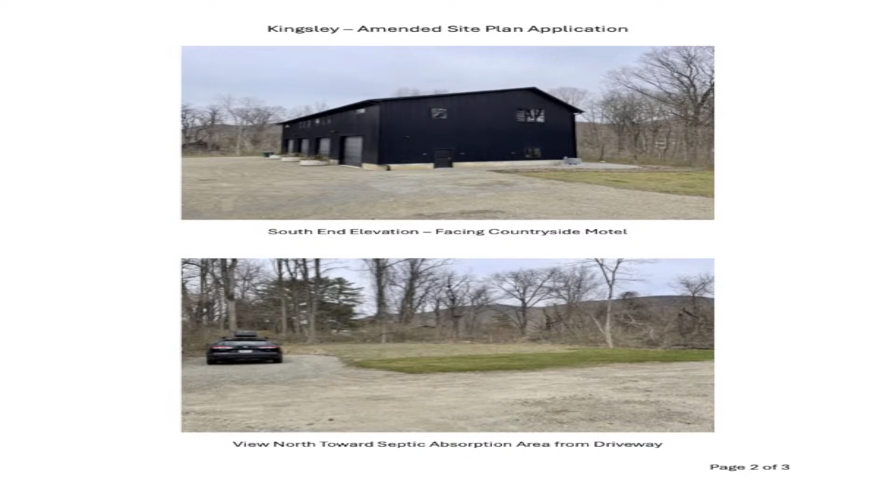I think it was just the truck traffic, I don't know exactly what, but I believe it was the truck traffic. There will be no commercial operations, whether Kingsley Tree Care or Forrest's business or any other commercial business, with this amended site plan. There will be no commercial truck traffic associated with this once the amended site plan is fully executed.

Okay, board members' questions, and then we can go to Ron's comments. On everything—parking, or just? Whatever you want to ask. We're getting down to the short straws on this one, so okay, just a couple questions.

So what was the original parking layout for when it was commercial, when it was a mix? There were four of the nine required parking spaces in the garage, and there were two on either side of the building, and then four off to the side. Is that where that car is, where the four were?

No, that actually wasn't one of them. Oh, I see. So the parking would have been one space on this side of the building, one on the other side, then four along the end, and four on the inside.

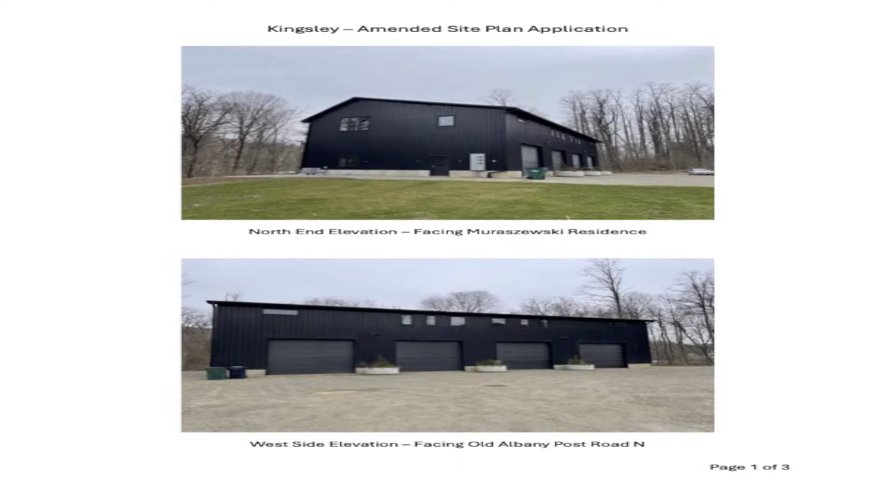So this is a question for, I guess, Steve or Ron. So this is a change to a multifamily use? Isn't there a parking requirement for multifamily? What is that?

He's got parking illustrated on his amended site plan. So is that like, what, one per unit? I think it's 1.5 per dwelling unit. Right. The bedroom doesn't factor in.

So what they're gonna do with... they are planning on some buffering along the front, some landscaping along the front of the building. Let's finish the question, let's just focus on the parking for now. The question was asked: how many spaces and where are they? Let's just do that question.

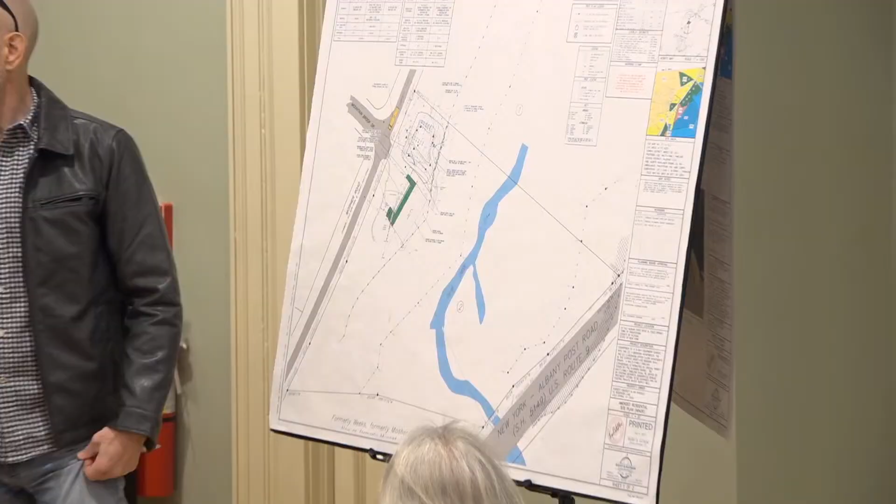Right now the cars park along here, and there was one space here, but they park right along the side here. I don't know if the idea is that they park along the front, but there is this parking area here as well. There is proposed landscaping and buffering along the front because this is where the windows are. So you have these 4 bays now, and you park inside the building.

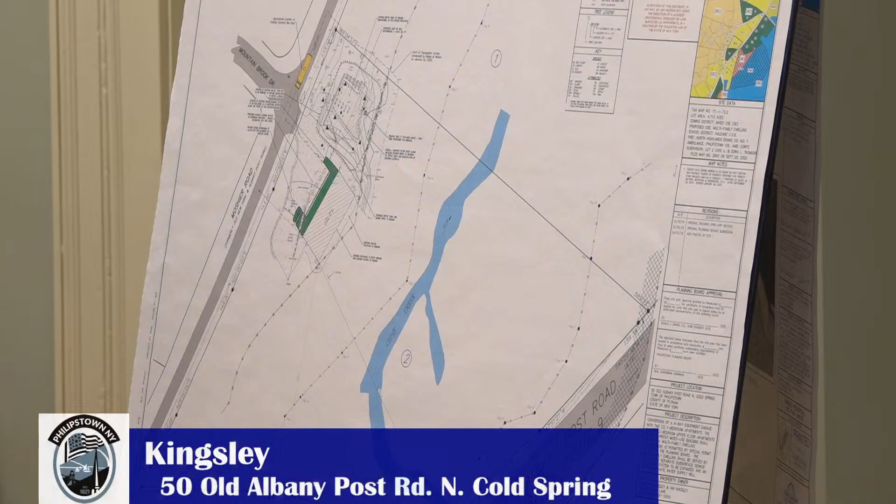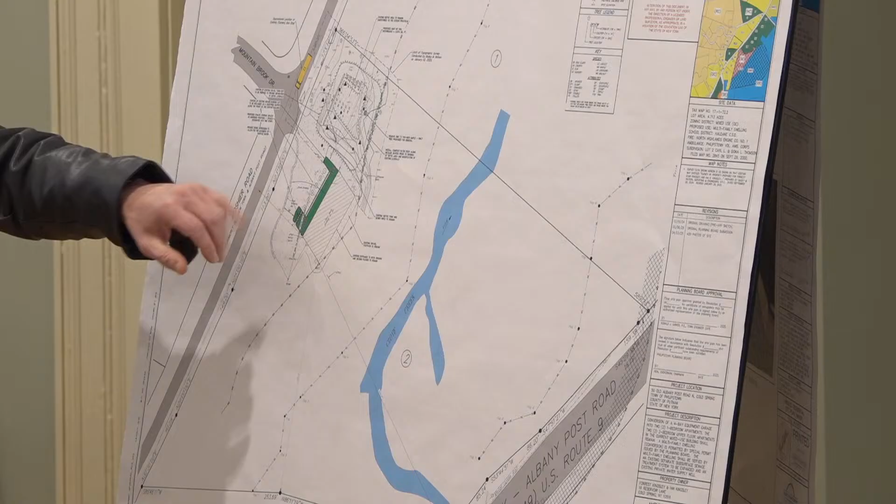They don't plan on that, that's plenty. I'm sorry, do we need to identify where the parking spaces are, or is this just a gaggle of parking? We do, he does have it shown on the site plan. We have 6 parking spaces, the required 6 parking spaces along the front of the building. That's where we have designated on the site plan. Okay, fine.

Okay, next question? Laura, did you have a second question? No. Okay, other questions? Heidi?

Well, I feel like basically everything that was raised at the public hearing got addressed, or we saw it for ourselves — like what you're saying about the propane tanks, totally agree. Also the trucks, to the extent that people were worried the truck traffic would continue, it's not going to. As Neil mentioned, it's just going to be cars, so you'd think the neighbors or whoever made the comments would actually be happier now.

But the only thing I didn't hear anything about was the school bus — the school bus stop has not moved, right? So the school bus, this is where the bus stop is. That's where it was during the original site plan, and that's where it is now.

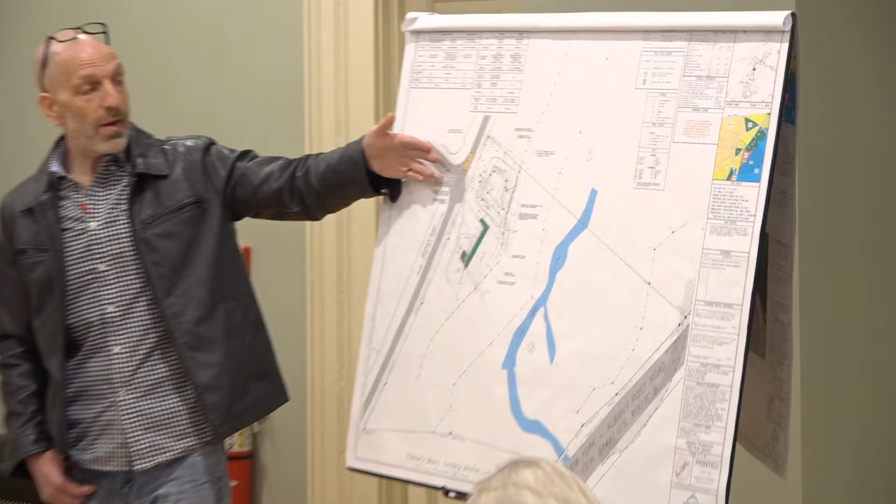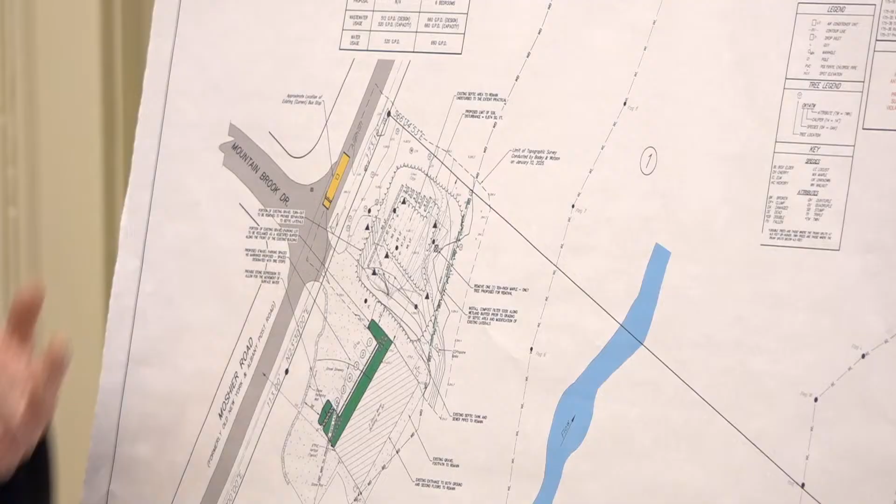But that's where it is. It stops right at the end of Mountain Brook, picks up the kids and goes. That's where it is, and that's where the comment from the neighbors was — that it was right there — but that's where it is. That's where it always was, and it was found to be safe. Okay.

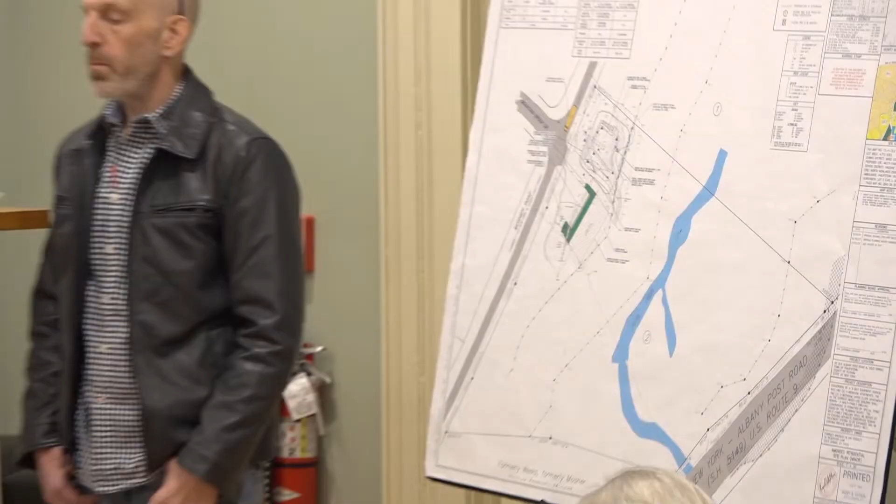Okay, other questions? Peter, anything? Joe? No? Yes, okay. So let's go back and talk about the driveway question. So just to be clear, Ron, in the original site plan that we approved, the applicant was required to pave, and it wasn't done?

Right. Okay, may I ask a question? Please, of course. On Ron's memo, there is an abbreviation, DWGS — could I have that spelled out for me? Drawings. Oh, that's just shorthand for drawings? Okay.

Okay, so just back to this question: on the site plan that we approved, which we are now trying to amend, it was required to be paved, and that was not done? Correct. Okay, and the logic for the paving was?

I think it's very typically accomplished on site plans in developed areas of the town. If you're on a rural residential road, as you've seen throughout the town, many times the highway won't require paving of the driveway. But typically in a more suburban, residentially developed area, paving is typically done on driveways or parking areas.

Okay, so now you're asking to not do the thing that we already asked you to do? Well, I don't believe it ever came up. Hold on — Ron just said that the site plan you're trying to get amended has a requirement to pave. Is that not what Ron just said?

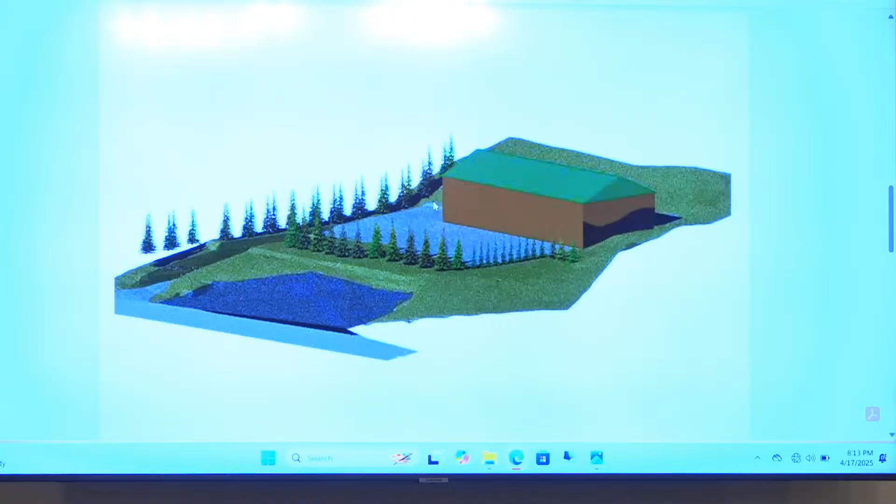One was to try and illustrate what the driveway would look like from Route 9, because it has the wall. So this is a render which shows the driveway and a wall, and it's hard to see because it's very dark, so I made a lighter one so that you can see that the walls, at the top, meld into the existing grade, so there's not a drop off there, but the face of the wall is within the driveway. So the driveway will come up and you'll have a wall on either side.

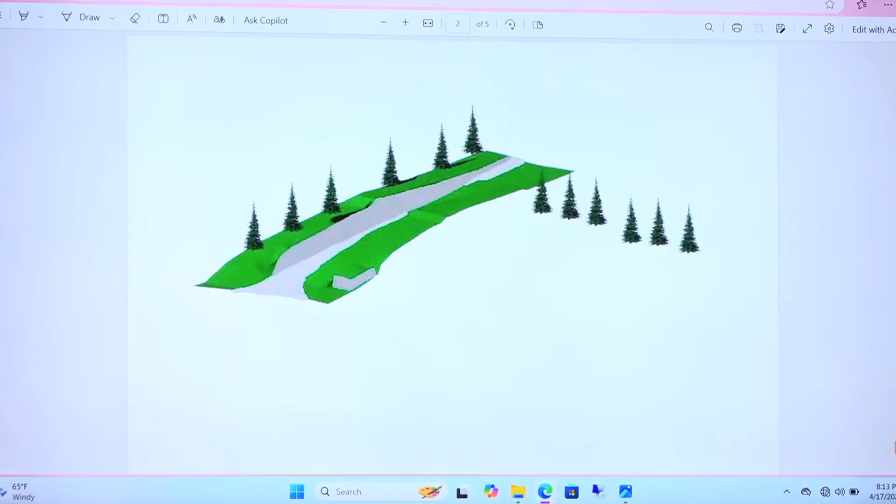Can you try your other one, please? Sure. This is what I'm getting confused about. How are those two things related? Oh, you're saying it's this thing up to the top, okay, thank you. This is the driveway here. Got it, I was looking for the Garrison garage, which is why I lost my orientation. Okay, I got it, and this is the new proposed building.

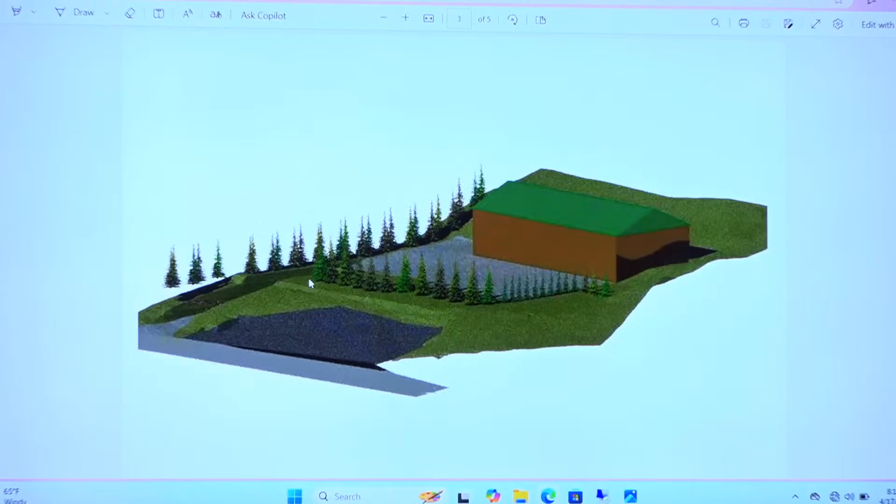So it's gonna be a cut, you're gonna create effectively some sort of, you're gonna raise it and then cut through it, is what it looks like. We're cutting through it, we're not raising anything, it's already existing at that elevation. We're cutting through in order to keep the elevation of the driveway down at 14%, we need to cut into it, because of the steep slope as it is right now. Got it, okay.

Okay, so then the other item was... sorry, this is not the right picture. You'll have to look at this one. Okay.

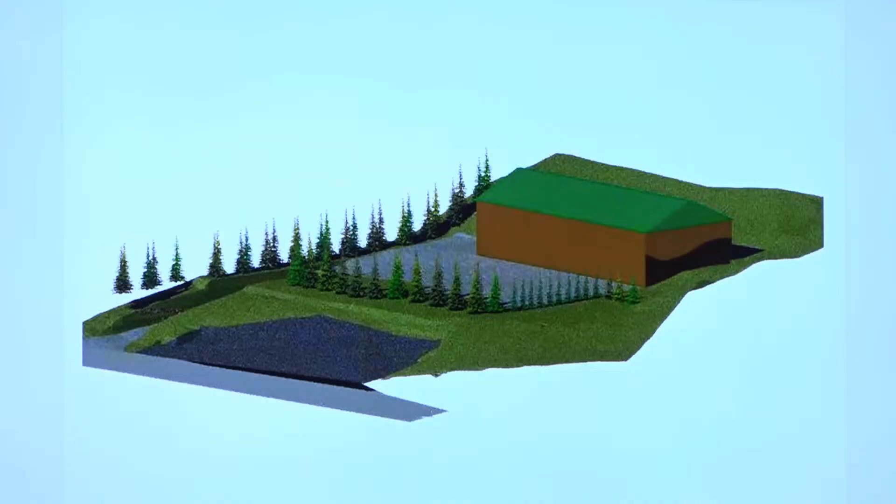So, as we did from Route 9, we had to actually go out and take a picture looking from Old West Point Road toward the site, and we superimposed the new proposed building showing the building, and then there's trees, which it's hard to see the dark trees against the dark building. But so when you're coming down West Point Road, you won't see into the site. You won't see the parking area. You'll see part of the building, but it's the upper part of the building.

Okay, good, thank you. Other questions? Or anything else you want to share, Margaret? No, those were the two items that you had asked for. Folks want to ask any questions?

Well, I was wondering, and I apologize if I missed something in the materials, but did you see that this person, Dan Bailey, submitted a letter? Yes. I was wondering if you have any thoughts about anything he said in the letter, just briefly. One, he had suggested that we put a guide rail.

Right, there is significant distance between the parking and the wall. We can put a guide rail there, but there will now be trees and there are wheel stops. So I don't really think that the guide rail is necessary, and also with the trees, I don't think putting a fence there is necessary. Along this edge is where he's saying, because the Garrison garage is here, and obviously we wouldn't want, if there are but there are cars parked there now, and I don't think he has any complaints. So with putting the screening, I actually think that it's above the garage.

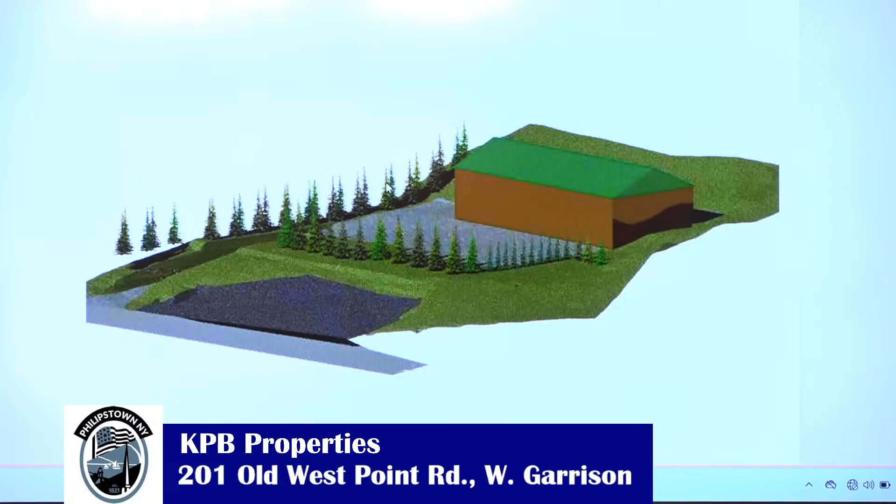I'm just trying to get some understanding of those commercial activities and whether there should be a fence along the frontage or along the Route 9 area, just to preclude views into the site where you might be storing plow blades or equipment during the day. There's no outdoor storage proposed.

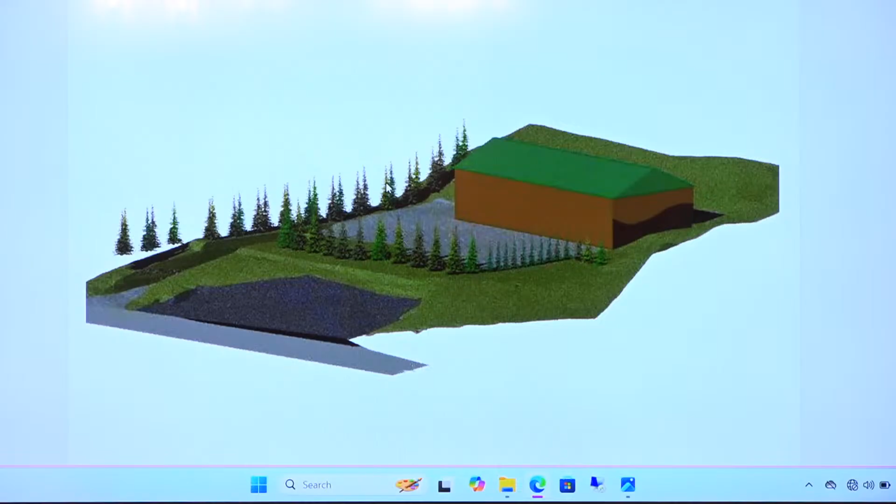Well, I'd rather put a fence, it's cheaper for me, that's not working anyway. If you want me to put a fence, I'll put a fence around the whole property, I'm fine with that. Seriously, I'd rather have a fence, better cameras I could put in there. It's one requirement, not both trees and fence.

I just want to make sure the board understands the potential impacts of any visual activity you'll be accomplishing on site.

Ron, for the applicant's sake, could you explain the requirement in the zoning, chapter 1, section 165 or something like that? I can't remember the exact one on screening, but I believe it says, as long as it's not a retail business, it should be screened to the greatest extent practicable.

Questions have been raised at the prior public hearing, more so from old West Point Road West, but just so you understand, there is no fence proposed. I just wanted the board to understand the issue of what the view is from Route 9 and relative visibility for your activities on site.

The Garrison garage people - my cousin lives there, it's not a problem, and the lights go over the top of the building. The lights go over the top of the building, they don't go into the back, because there's a 2-foot wall there.

The microphone isn't for here, it's for all the kids watching at home, so you're going to have to stop doing the tag team thing. Oh, it works.

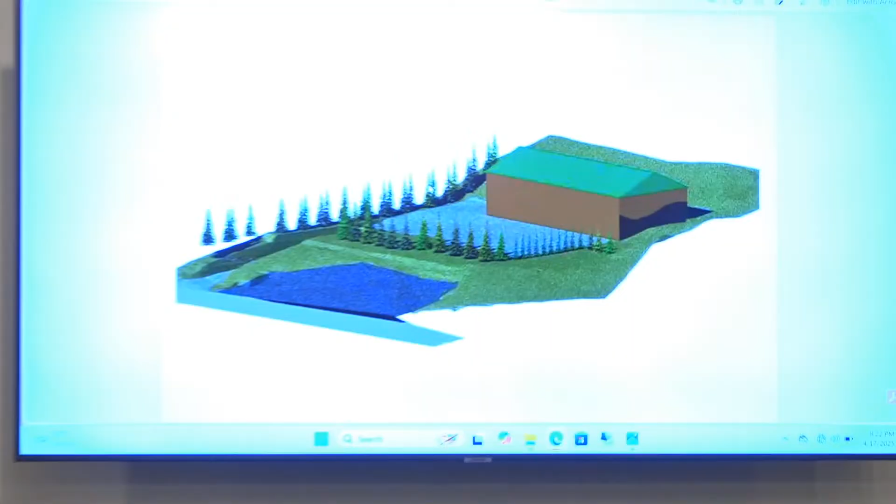Thank you, Laura. And those are going to be conditions in the site plan, right? Yeah, great, so it's probably in the site plan and I didn't see it. What is the elevation of that cut at the highest point? It's about 9 feet at the highest point.

And what is the solution that you addressed with the neighbor on that, along the line of what Peter was just talking about? She had asked for additional screening and higher plants, and we did that, and we extended the fence up the hill. So there's a fence that runs along there, yes. I did not show it in here. That's fine, I'm just learning how to remember to do this.

I didn't bring the site plan. Use your cursor on the thing. Yeah.

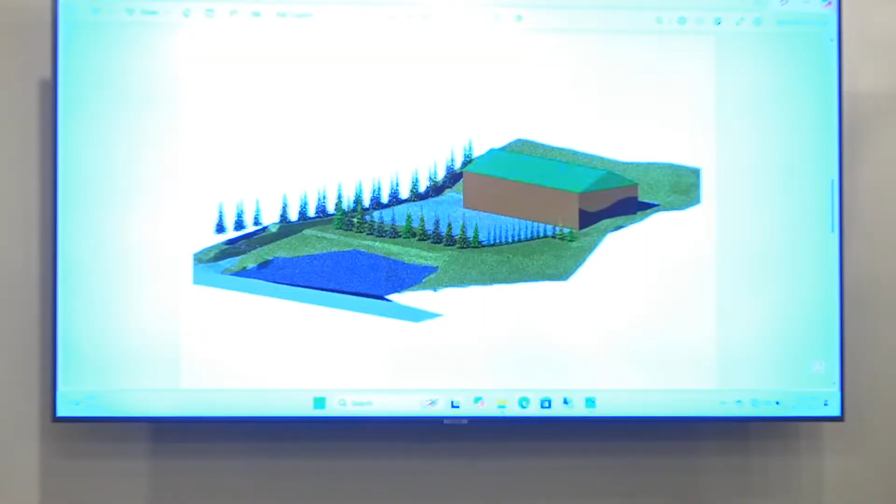So along this line, which is the property line, there is a fence now. It's going to be taken down and replaced with a new fence, and it will be extended longer. Got it.

Okay, other board members' questions? Heidi? There were a few other things in the letter raised by Dan Bailey, who wrote the letter. One was about whether rainwater would collect. I know you've addressed this before, and I think Joe had asked a question at our last meeting about how the water will be collected. Are you still satisfied the drainage is gonna be sufficient, that there's not gonna be a stream of water coming down onto Route 9?

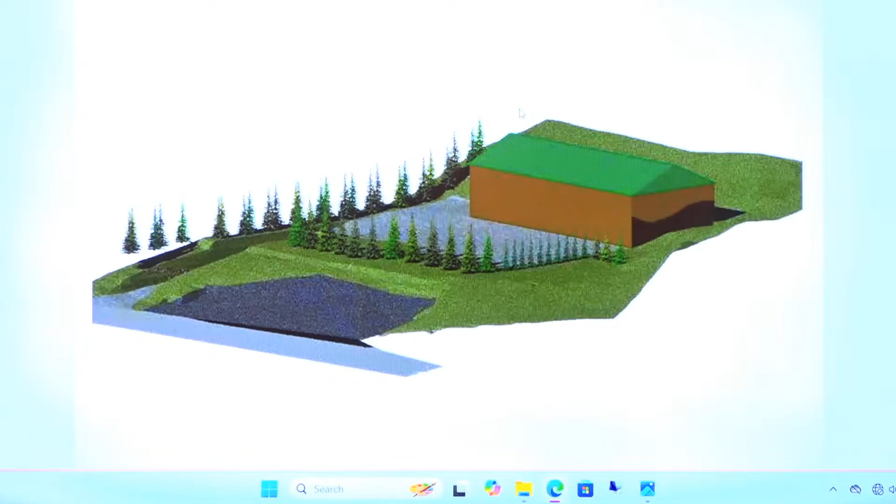Yeah, there's a negative grade between Route 9 and the driveway, so it goes down before it goes up, and everything is directed to the south. It will run along, off of the road, but down, because the topography runs south and runs off the road, so that drainage exists in that direction, and it will continue to go that way.

Okay, other questions? Just had a question as well from Dan Bailey. He brings up the yield of the well. That's under the health department's purview. Oh, okay, right. We can still go ahead and ask if you want to. What's your question? Whether there's enough yield from the well to provide enough water for the commercial and residential properties.

There is enough yield from the well to provide what's necessary because they are not going to be washing trucks on site. It's only for the office, so it's very minimal use within the building. Any other questions from the board?

Okay, Ron, where do you think we stand? The board's addressed all administrative, procedural requirements of the code. You're now, I think, at a point with the closure of the public hearing to seek a resolution be prepared. Any other questions that would prevent us from directing Ron to prepare resolutions?

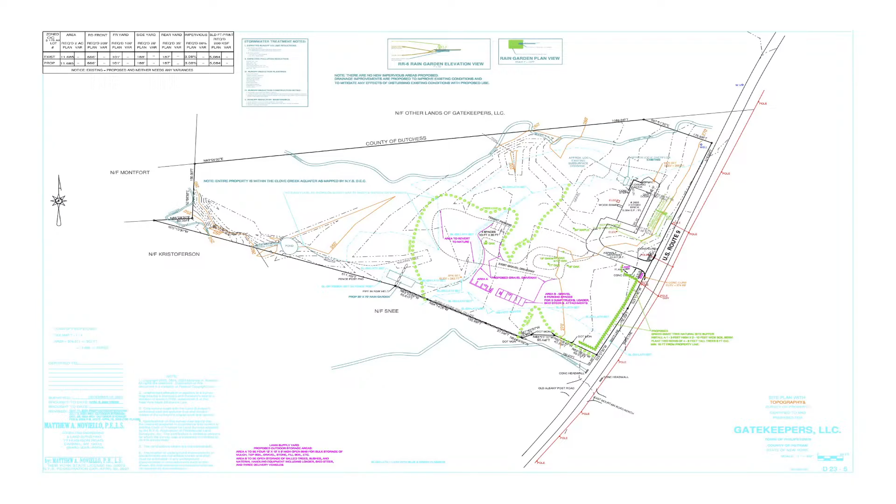Fine, all right, well then the public hearing will take place as long as you're available. You may not be available, of course, but that's okay. That'd be a good reason not to be at the public hearing. So what's your schedule for the next board meeting, please?

That's it on this topic, unless anyone has any other business. One other thing to add, and I hate to dwell on technicalities, but your EAF still has errors and incomplete sections in it. If you like, I could send you an email outlining what they are, if you want to take a crack at it yourself. If you wouldn't mind, I'd appreciate that. Thank you, Steve, that's helpful.

It's not scheduled yet, because we're waiting for the flagging. The natural resource officer was coming out to start the flagging. He did start already, and as soon as he's completing this weekend, then we could bring them in.

Okay, our advisors are in public negotiation. What's going on, guys? We good? It's not about how to handle the EAF. I think what we're going to do is I'll send my comments to Ron, and then he'll give him a comment memo with his comments as well. Okay, very helpful.

Is there anything in particular that's notable that would be a topic at the public hearing that they need? It's all technical things and boxes that were checked in error, I think. Obviously we'll find out, but it's just trying to save you the hassle of someone at the public hearing saying something.